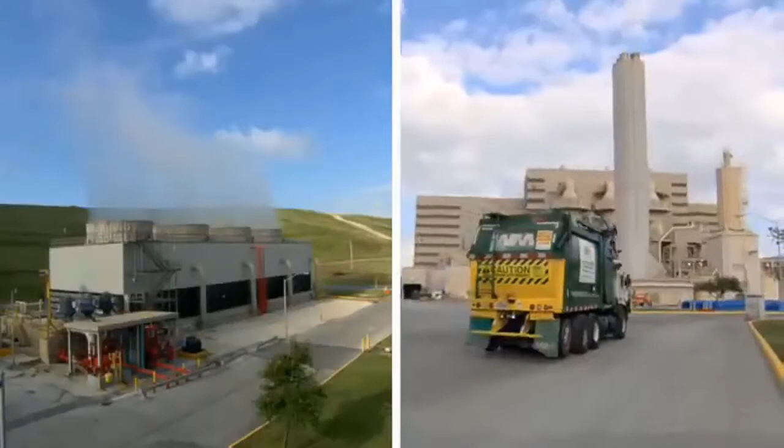Renewable energy. In one Florida county, trash is brought to two waste-to-energy facilities. At one, cranes feed garbage into boilers where it is burned at over 2,000 degrees Fahrenheit. The heat of combustion is used to turn water into steam. Then the steam is sent to a turbine generator where it is converted into energy and then sent out as electricity to 70,000 homes and businesses.

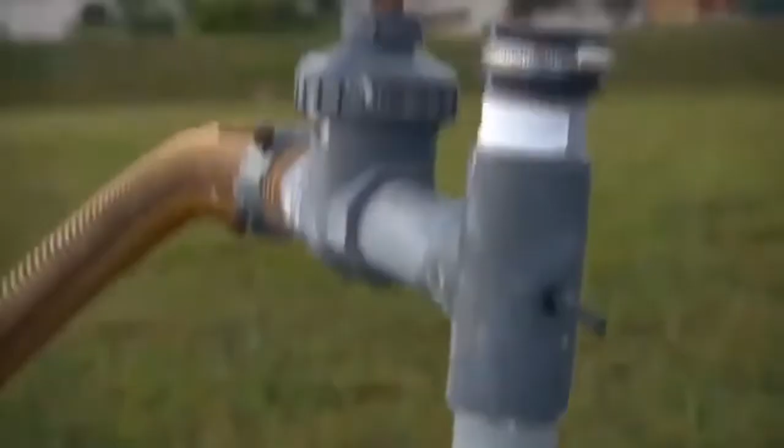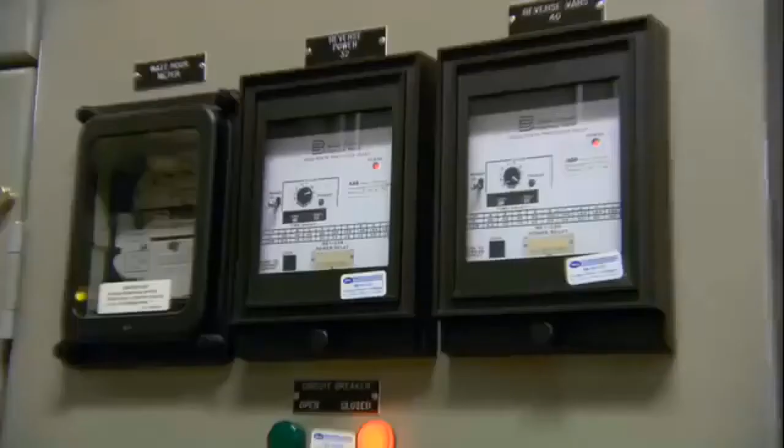At the other, the trash is buried. As it starts to naturally decompose, over 300 wells collect the methane gas emitted by the decaying waste. The gas is sent down a pipeline to an on-site plant. There, the gas is compressed to 140 psi and injected into turbines where it is used to generate electricity to power over 5,000 homes. Here, the saying, "one person's trash is another's treasure," has new meaning.

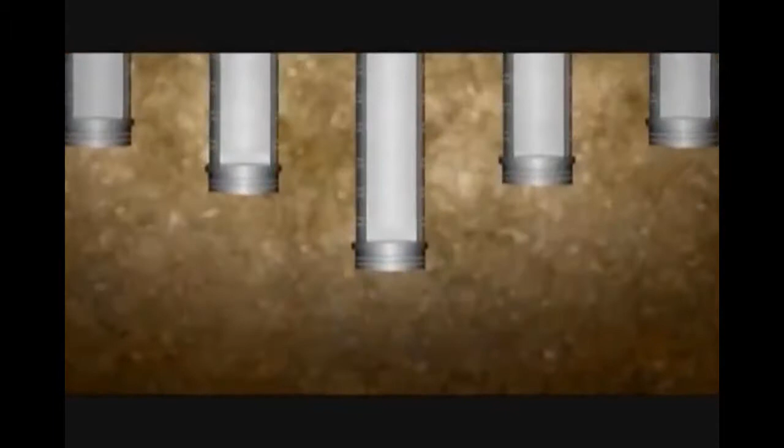The process begins when waste is collected. One person produces an average of 4.5 pounds of trash every day. While some waste can be recycled, a portion is taken to a landfill for safe disposal. Once inside the landfill, waste decomposes to produce methane. Landfill gas, comprised of about 50% methane, is collected by using an underground network of pipes and wells.

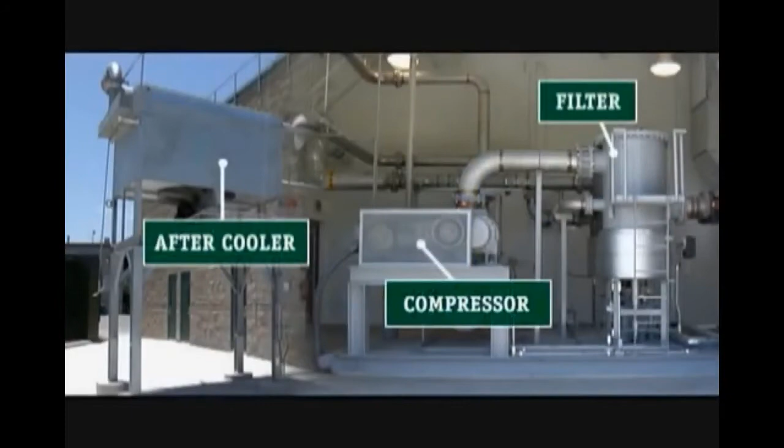From this network, the gas is drawn to a renewable energy facility's compression system where the gas is dewatered, pressurized, and filtered to make it clean. When landfill gas enters this system, it first passes through a filter, which removes any large pieces of debris and some liquids that may have become mixed with the gas. After initial filtering, it enters a compressor, which raises its pressure until it's high enough for the gas to be used as a fuel. During compression, the temperature of the gas rises and must be cooled down by an aftercooler.

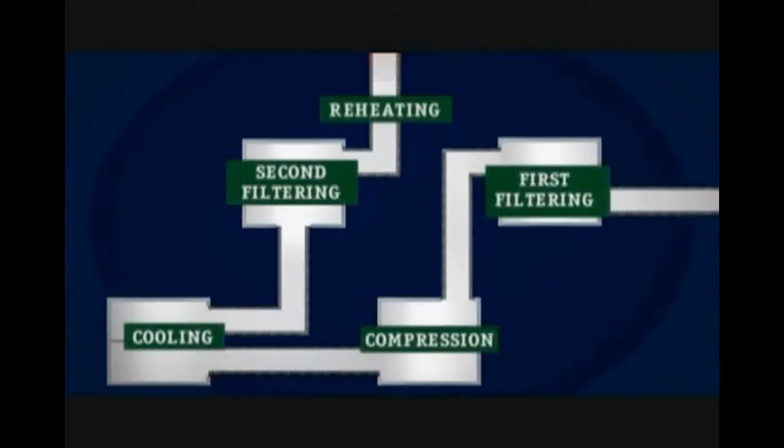Inside the aftercooler, the temperature of the gas is lowered, which allows for any remaining moisture to be condensed. The gas is then filtered a second time to remove the condensed moisture. At this stage, the gas is reheated to prevent any further condensation and is ready to be used as a renewable energy fuel. The whole process, from start to finish, takes seconds. Waste management renewable energy facilities use either an engine or a turbine to generate power. Both follow the same basic principle to produce electricity.

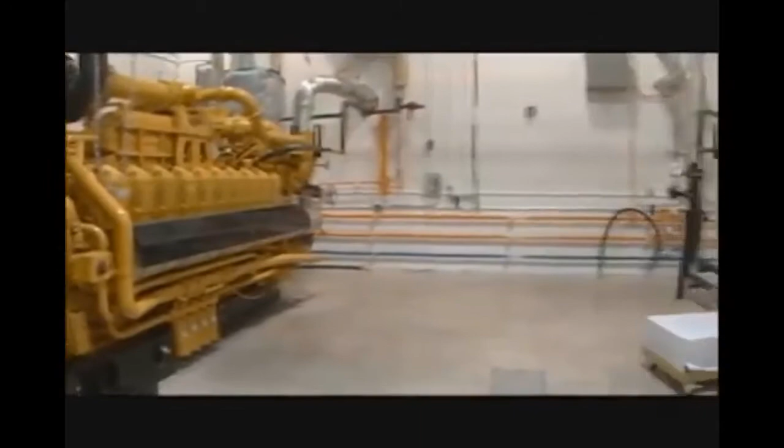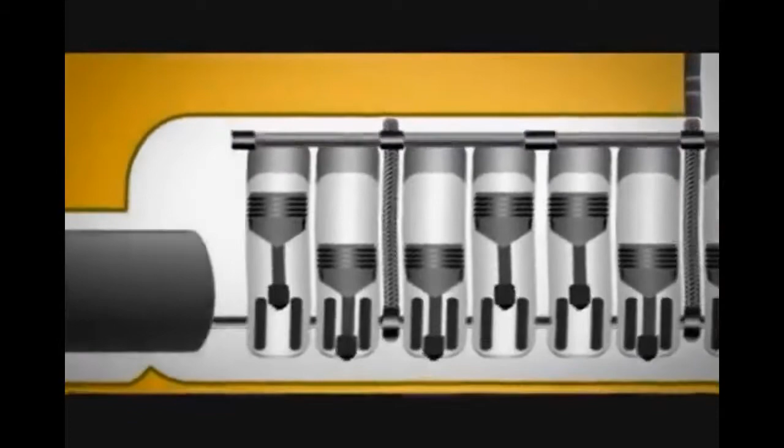An engine that runs on landfill gas really isn't that different from a car engine. It's equipped with pistons, an air filter, exhaust, radiators, and even batteries. Landfill gas enters the engine and is combusted, causing the pistons to spin a drive shaft. The drive shaft is connected to a generator, which converts the power into electricity.

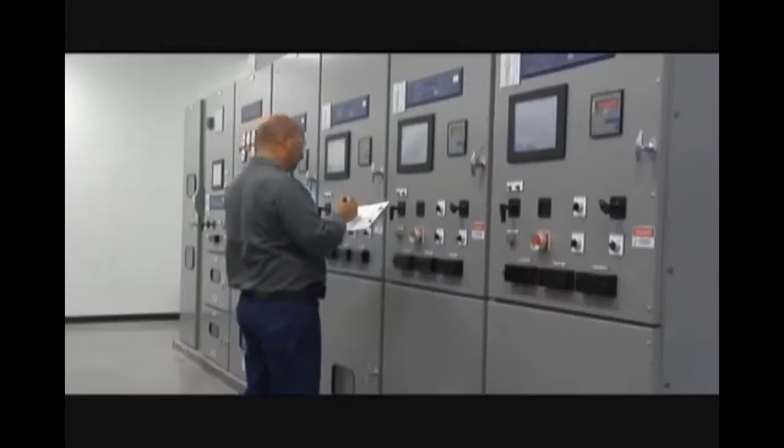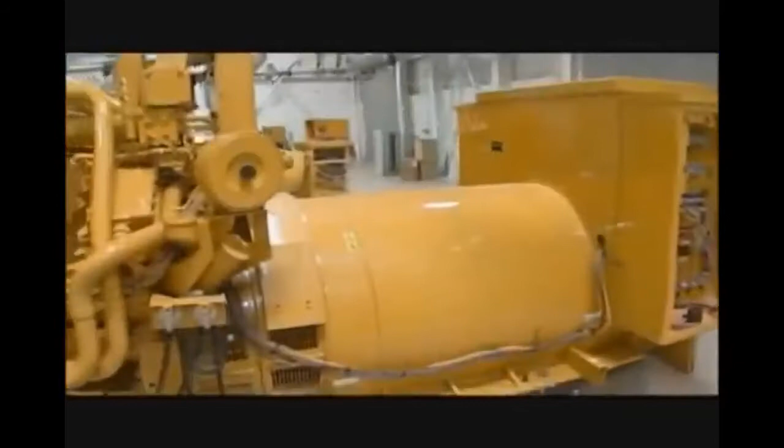The electricity is then sent to state-of-the-art control systems, which ensure that the plant is meeting the needs of the utility. Control systems direct electricity to transformers located on-site, which either raise or lower the voltage. Low-voltage electricity is used to power equipment within the renewable energy facility, while high-voltage electricity is exported to the utility grid to supply energy for communities and businesses.

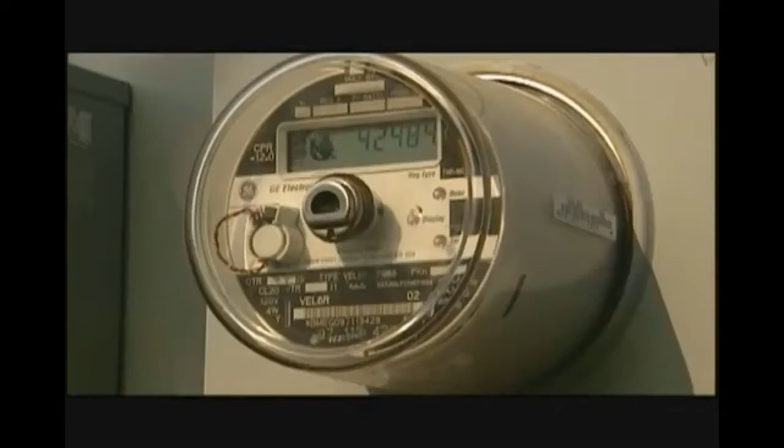31 miles outside of San Francisco, the trucks finally arrive at the Altamont landfill site. Right now, it's like the barren landscape of some cold, unfriendly planet. But today's landfill is tomorrow's golf course. Stuck underground in various parts of California sits 1.2 billion tons of waste. The massive basin currently being filled has been lined with clay and a huge impermeable membrane made from high-density polyethylene and geotextile. This lining means each basin acts a bit like a giant plastic container, preventing the waste from contaminating the surrounding soil and water table.

Almost half of this waste is organic material, like chicken legs and rotten tomatoes. And as it decomposes, it generates potentially explosive gases. What's more, any trapped air can cause potentially dangerous subsidence. So to remove the air and make the trash good to build on, it needs to be squashed. And that's a job for the lords of the landfill, a team of enormous bulldozers and compactors. With over 7,700 tons of waste arriving every day, they must work quickly.

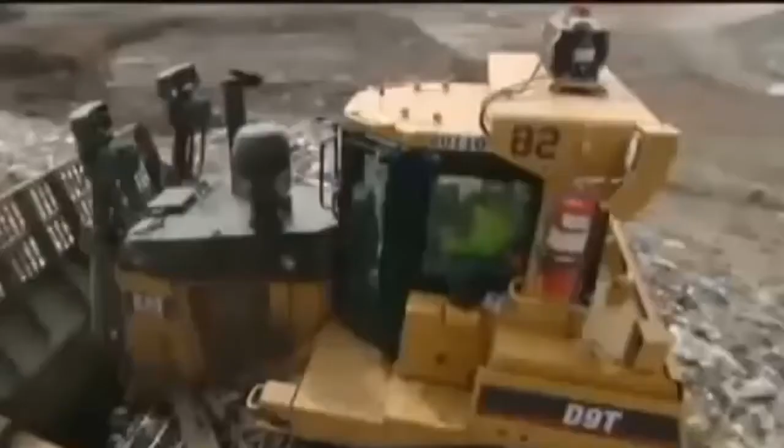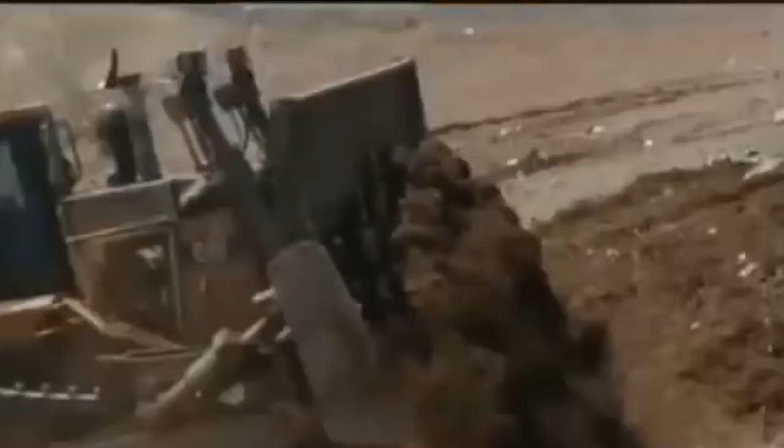First up is the compactor. With a pressure of nearly 40 pounds per square inch, its 50-ton wheels act like giant rolling pins, crushing the waste into solid mass. Next, it's the bulldozer's turn. They cover the waste with a layer of soil and recycled car upholstery known as auto fluff, which helps to seal in the smell and deters scavenging animals. Finally, everything is covered with a permanent layer of soil.

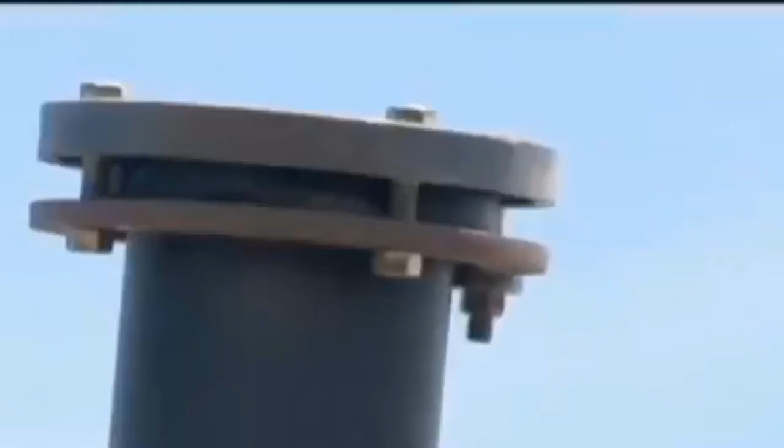But that's not quite the end of the story, because even this buried waste is put to good use. As the rubbish rots, it gives off valuable methane gas, which is harvested by these wells, which are scattered across the site. The methane extracted feeds a gas turbine, which produces enough electricity to power over 6,500 homes.

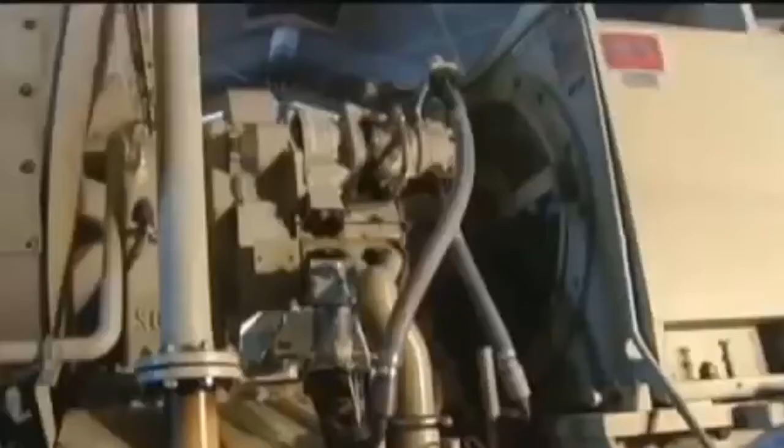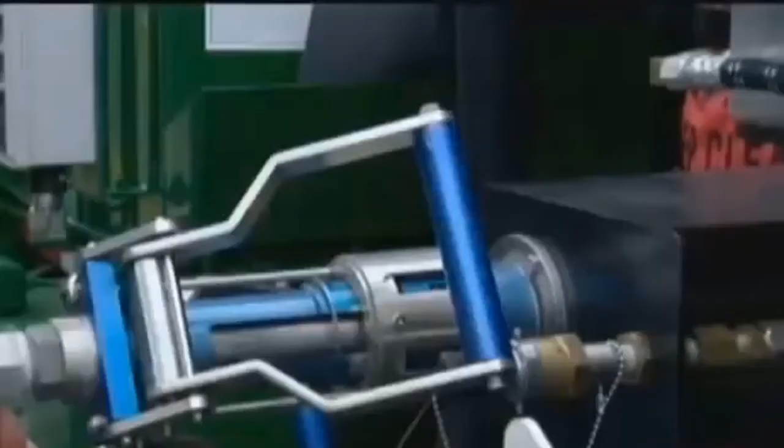The methane extracted feeds a gas turbine, which produces enough electricity to power over 6,500 homes.

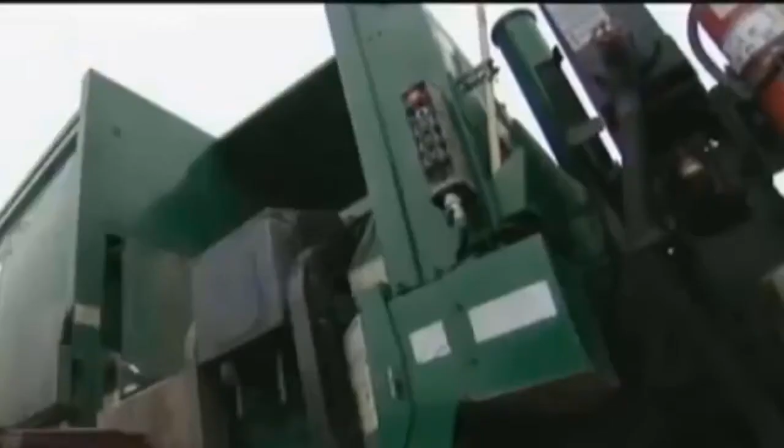What's more, there is also a pilot project to turn some of the methane into liquid natural gas, which will eventually fuel the city's fleet of refuse trucks.

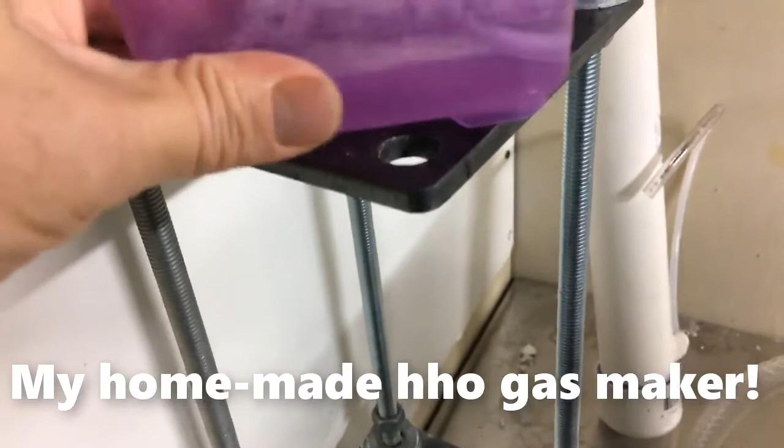See the bubbles there? Just straight seawater. Okay? Shut that off. Bring this over. Take out my lighter. Wow! Oh my God!